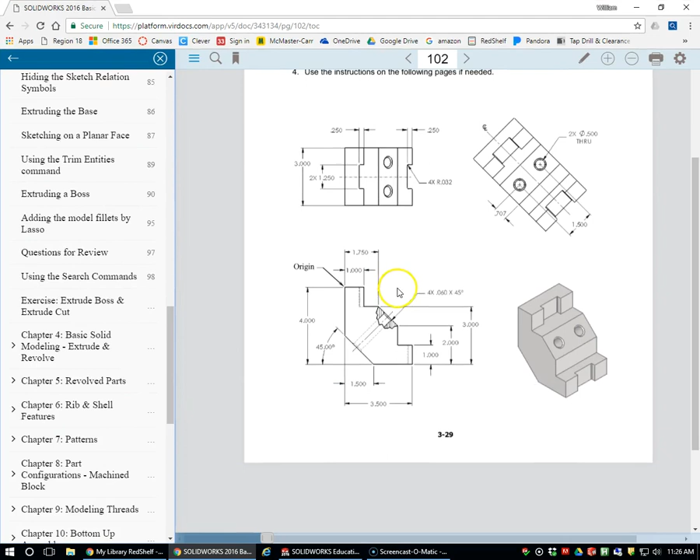If we take a look at this page for a moment, this part is shown in a front view with a broken out section, and a top view. This is referred to as an auxiliary view, projecting this plane up, and we have our isometric view here. All three views are necessary to give us all the details of this particular part.

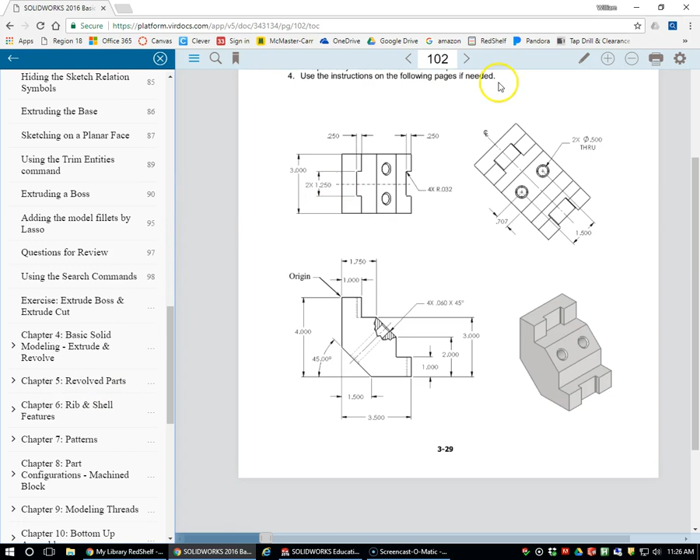We're going to move forward and get started, and most of the drawing is done by creating this sketch. Notice the location of the origin—we'll refer to that once we get started in the drawing. This part is drawn in inches.

I'm going to go ahead and get started by creating a new part within SolidWorks. It's always best to check your units—we're in inches, pounds, and seconds. I'm going to go in one step further and edit the units to make sure we're calling out to 3 decimal places, because some of the dimensions are shown in the book to 3 decimal places.

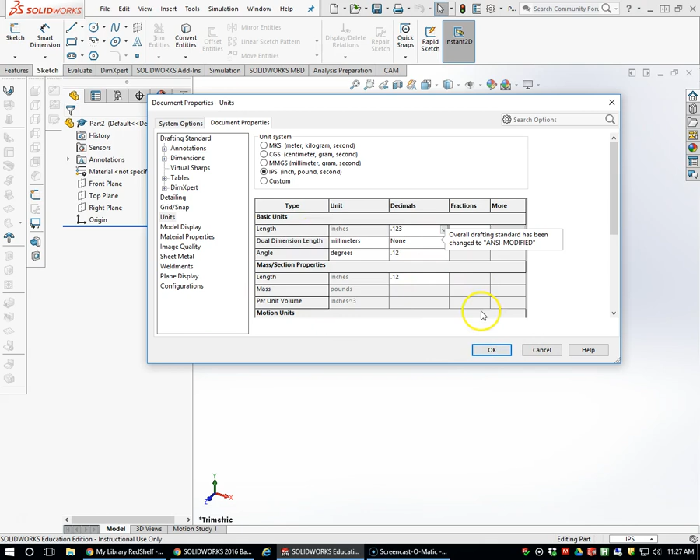We're asked to start by sketching on the front plane. I'm going to turn all 3 planes on for a moment first, just so you can see them. Now you have all 3 planes visible. I'll exit that sketch since I didn't put anything on it, so it's going to go away.

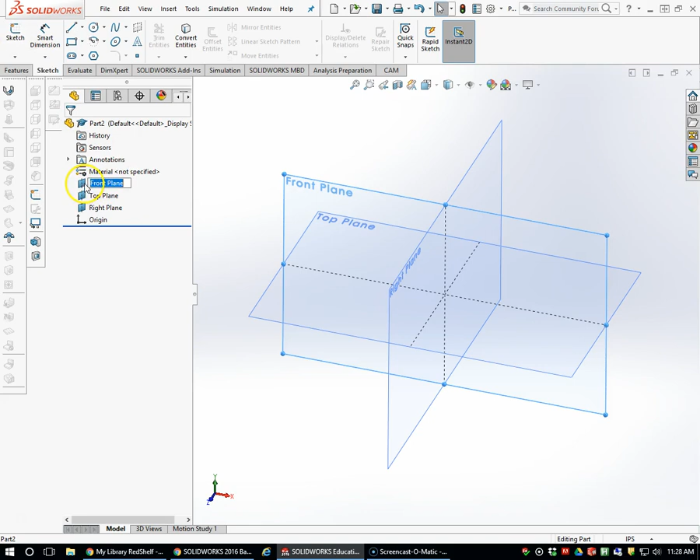There's a number of ways to select the front plane to make a sketch. I can select it first and then go to sketch, or select it here and go to sketch—there's a number of ways to tell SolidWorks that this is the surface we want to draw on. I'll start a sketch, and you'll see that show up right here. Here's my origin. We're going to begin by drawing the feature shown on page 3-30.

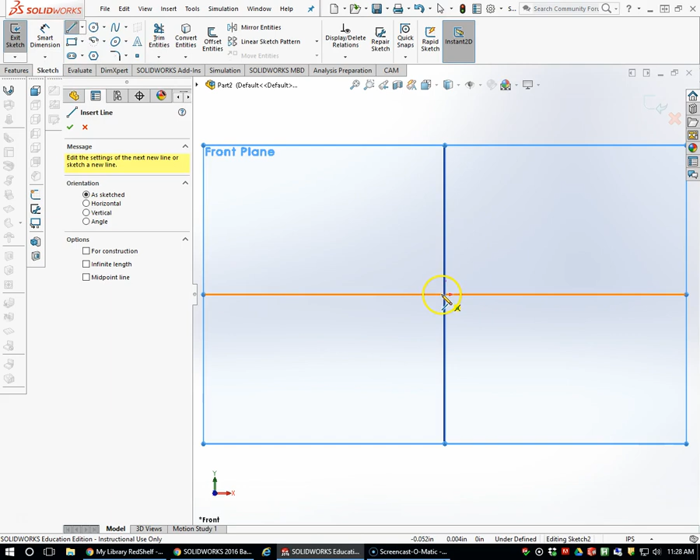I'm going to start with my line tool and just try to recreate this shape as a rough sketch.

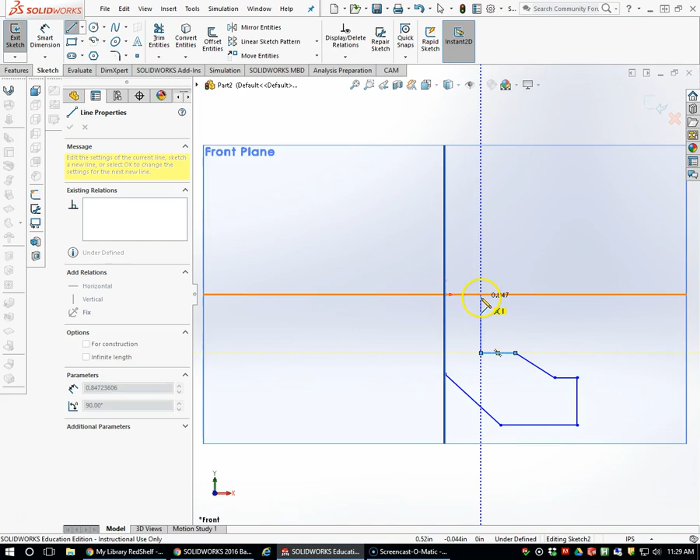The proportions don't need to be perfect yet, because the next step is to go add some geometrical constraints and some dimensional constraints. I purposely drew these not parallel just to make sure the option was available for me to add that geometric constraint.

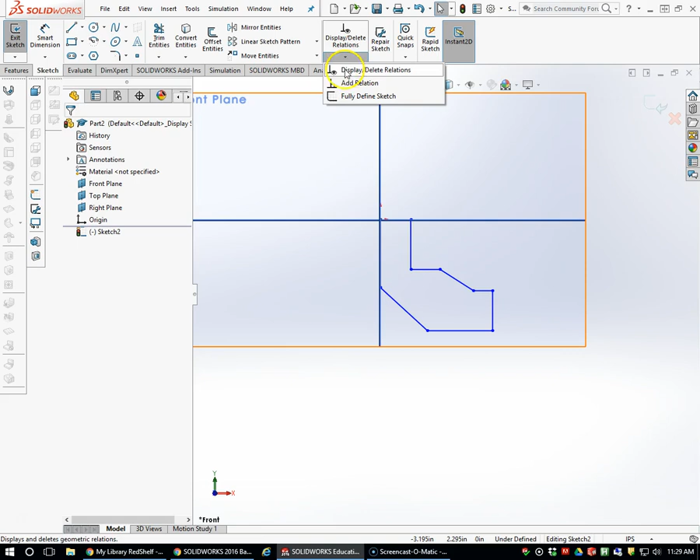So we could go to Add Relation, or if you just hold the control button down and select these 2 lines, make sure they are the only 2 lines highlighted at the moment—they turn light blue. I have the option now, if I click here, to make those lines parallel.

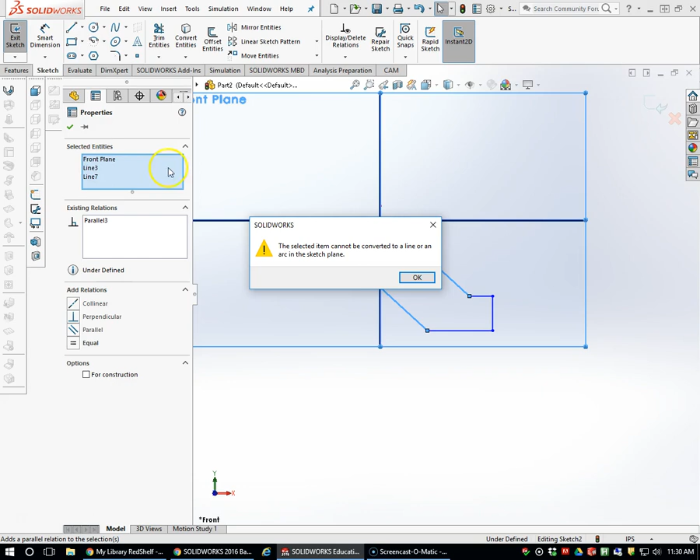I just mentioned to make sure you only have those 2 lines selected, and I didn't notice my front plane was currently light blue also, showing up here, and this is why I got this error message. All I need to do is delete that one option, go back to having just my 2 lines selected, and now I hit parallel and I shouldn't get an ugly message—now that looks good. SolidWorks is happy.

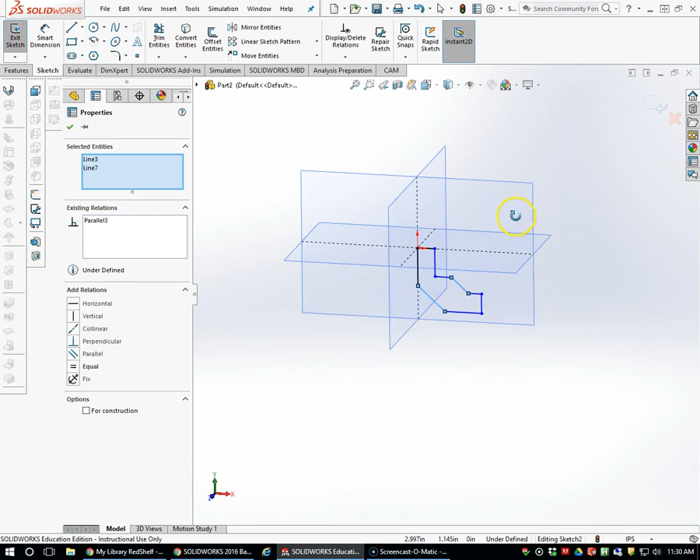Again, just make sure you don't have more items selected—you can check in this little dialog box right here. So we've got those selected. Again, I like to keep my sketch perpendicular when I'm drawing.

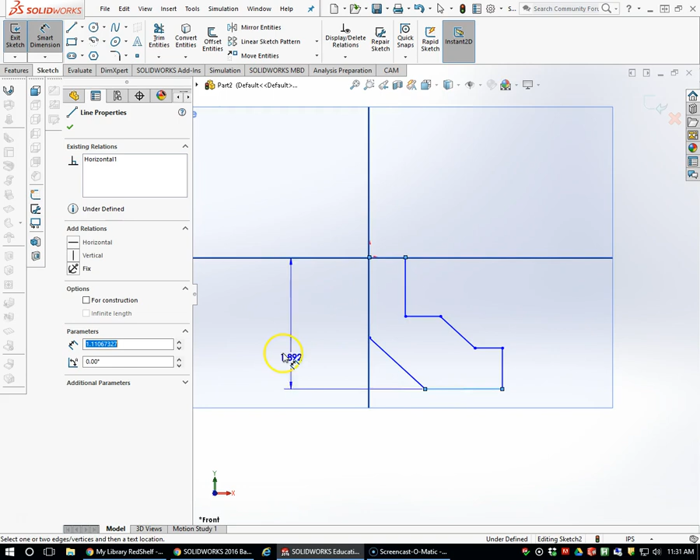I'm now going to go in and add all of these dimensions, so I'll grab my Smart Dimension tool. It's generally a good idea to add the overall dimensions first, the large ones—so I'll add my overall height, then my overall width. Don't panic too much if your part starts to look a little stretched out to start; it'll all add up once we add the final dimensions in.

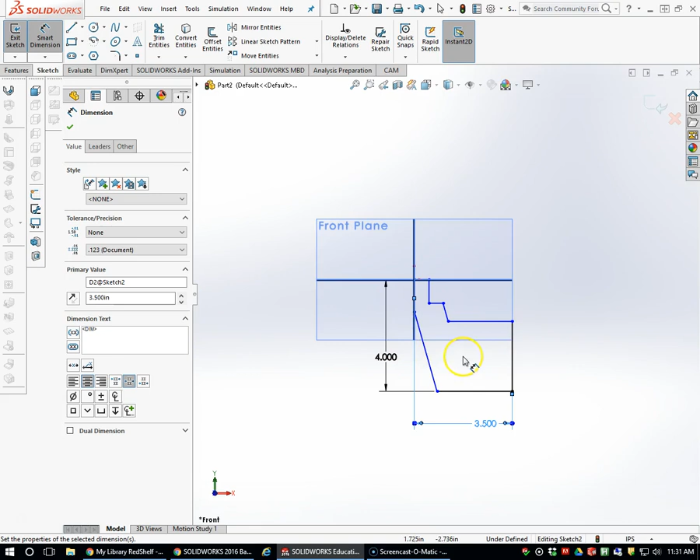Now I can go in and start adding these other dimensions. This one here is 1. There's a couple of ways to add that dimension—I could add it by selecting the single line. Let me go back to my dimension tool. If I select a line, I can add the dimension this way.

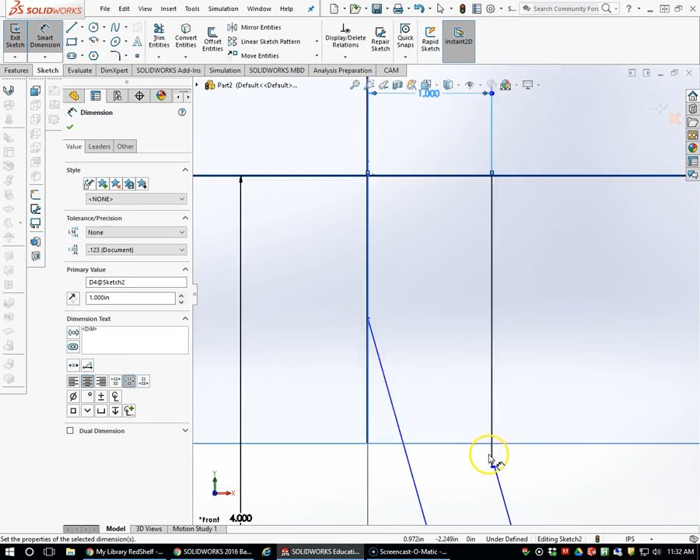Or I can reference the 2 points. Now this got a little confusing—this line got very short, so I'll add a dimension from here to here. It would have been smart of me to add this dimension first, 1.75. Pull that guy out, and we need to add this dimension.

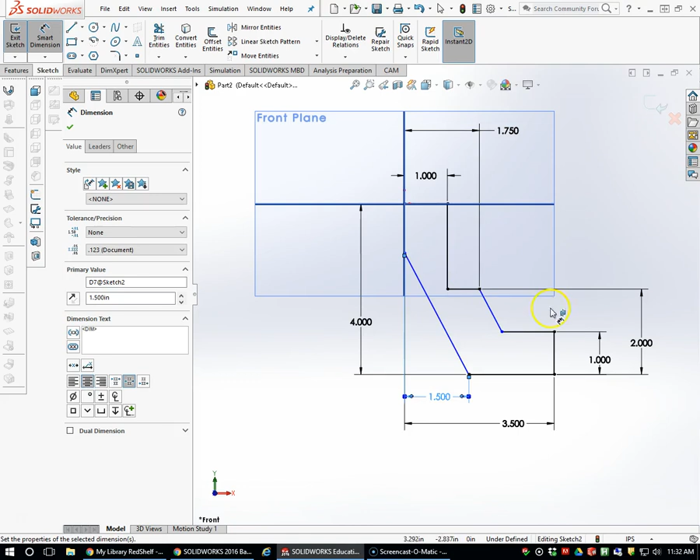Again, I can dimension to a point or to a line—that one's 2, starting to shape up. 1.5 for this guy.

And 3 for—oops, I put that dimension to the wrong location. That one's supposed to be 3. And there's supposed to be another line in here.

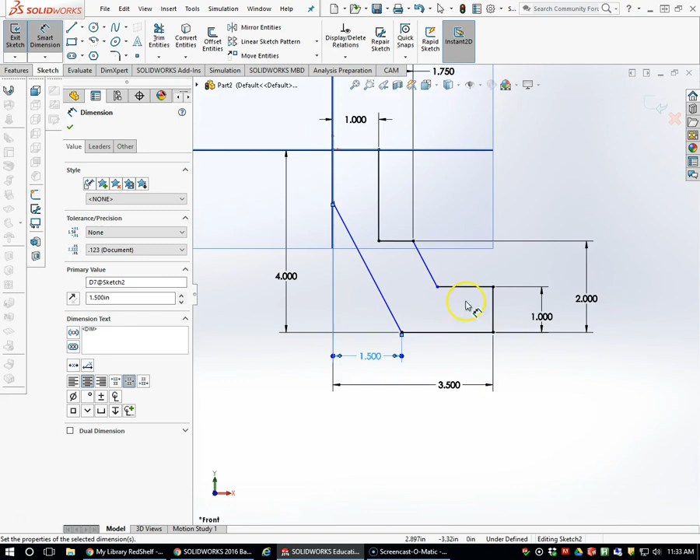I missed a feature, so I need to add a feature to that. Right now those two things are connected—let me see if I can get out of my smart dimension. I'm going to display relations.

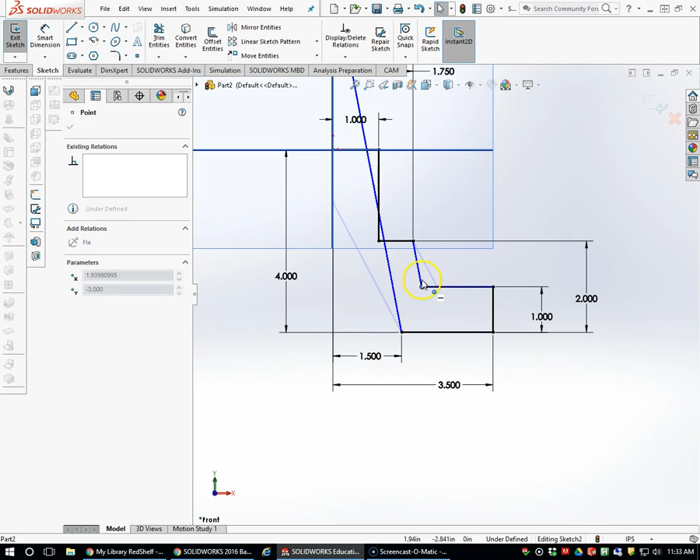Get out of that. All right. So I think the easiest thing to do would be to delete that line and redraw it. So that's what I'm going to do. Come in here, draw a line over, and then draw my line down. Now, of course, I'm going to need to go back and hold the control button

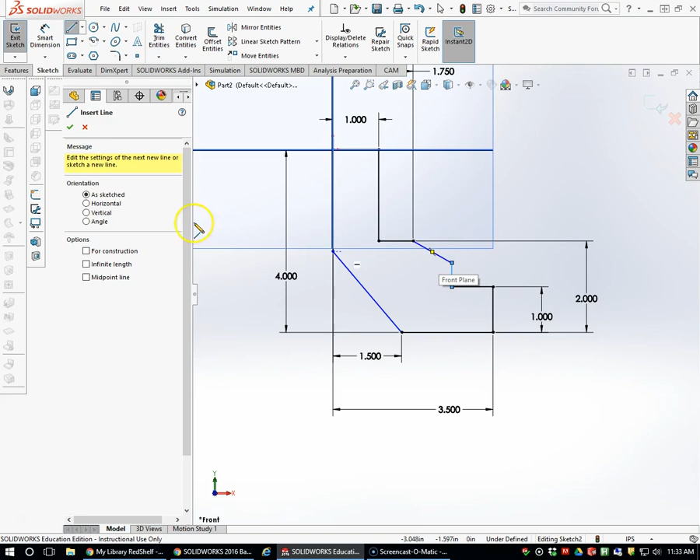and make these two parallel again. Here we go. So this dimension was actually supposed to go to here, and this dimension is supposed to be 3. So let's go ahead and fix that. If I click on this, it'll allow me to change that to 3. And then I can come back in and add a dimension to here.

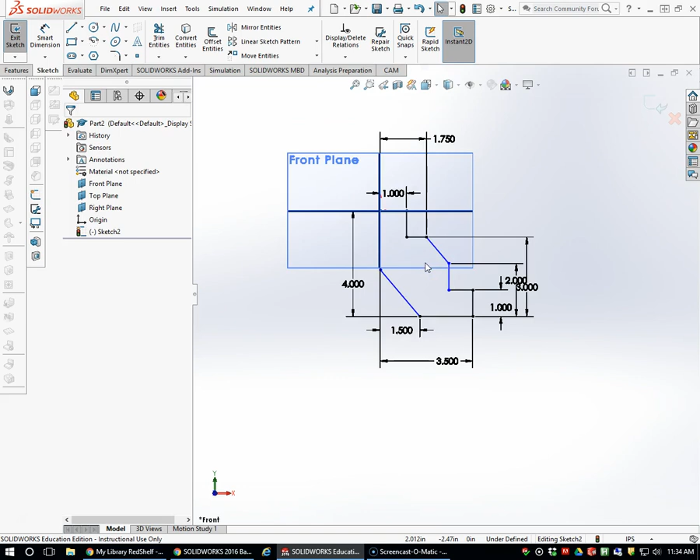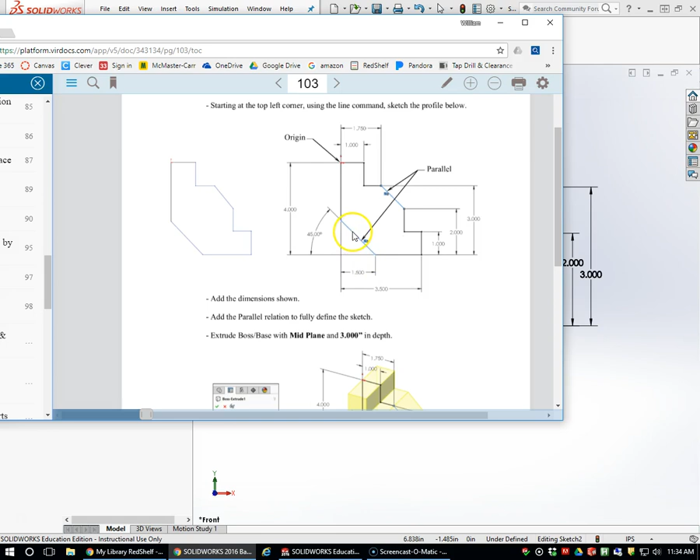Okay, these two are parallel. Now we just need to add, I think, all that's left is our angle dimension, which should finish defining our sketch. When you add an angle dimension, you're going to pick the 2 lines that you're referenced to. If I refer to the book just for a second, notice that this 45, if I carry this extension line down, it's referencing this line, and this extension line is referencing this line. So that tells me that these are the 2 lines that I need to select in order to get the correct dimension.

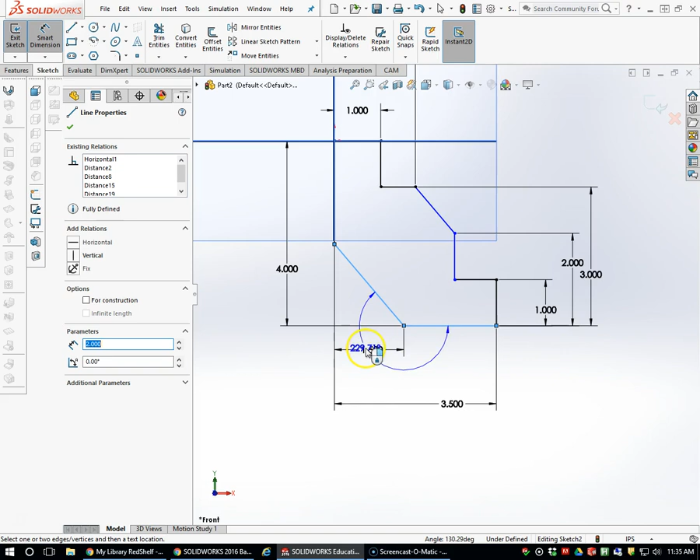So grab the Smart Dimension tool, select this line and this line. Now, as I move my cursor around, it gives me 4 different options of where I want to put this dimension. The one that matches the one in the book is this guy over here, and I'm going to type in 45 degrees. Notice that everything turns black and I get the message at the bottom telling me it's a fully defined sketch, which is good.

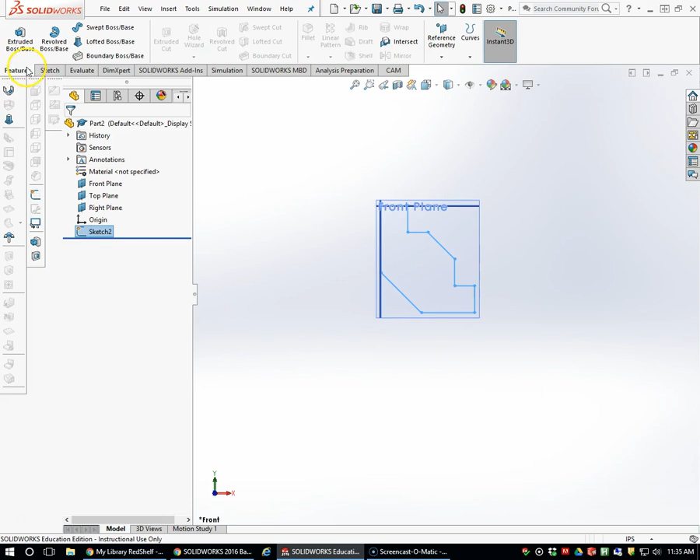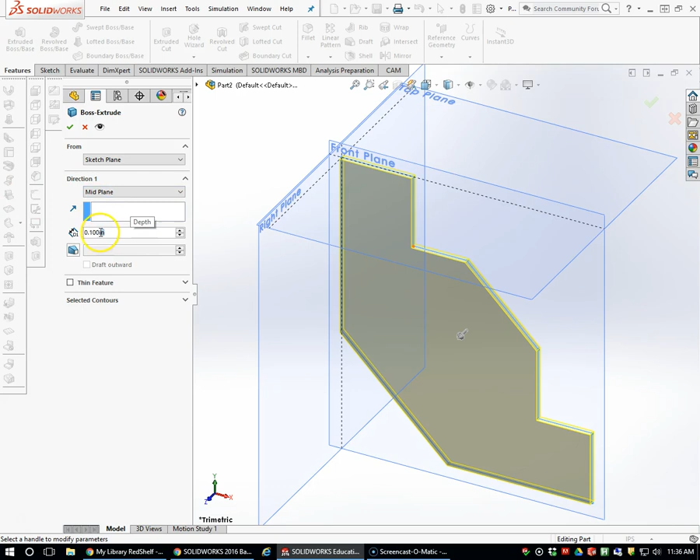So I can now exit the sketch, and referring to the instructions in the book, as we go to extrude this feature, or make a feature by extruding the sketch, we're going to select the mid-plane option. You're going to see what that does is it pushes the part out in both directions from the front plane, which is important when we get to some other features in this part. If you miss selecting the mid-plane, you're not going to be able to use the origin and have everything work the way you want it to. So that's 3 inches we're looking for here.

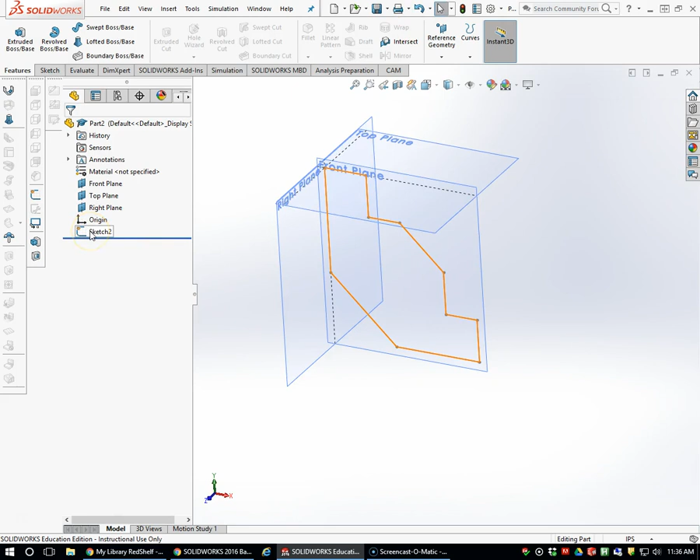And now we've got our extruded part. I'm going to undo that for a second because I did that kind of quickly, and I want you to notice that right now my sketch is not selected. If I try to go to Extruded Boss, SolidWorks doesn't know what I want to extrude. I can select it by going here, or a better way would be to click on this and reference the sketch here. Notice that it's now highlighted light blue, and I can do my extrusion.

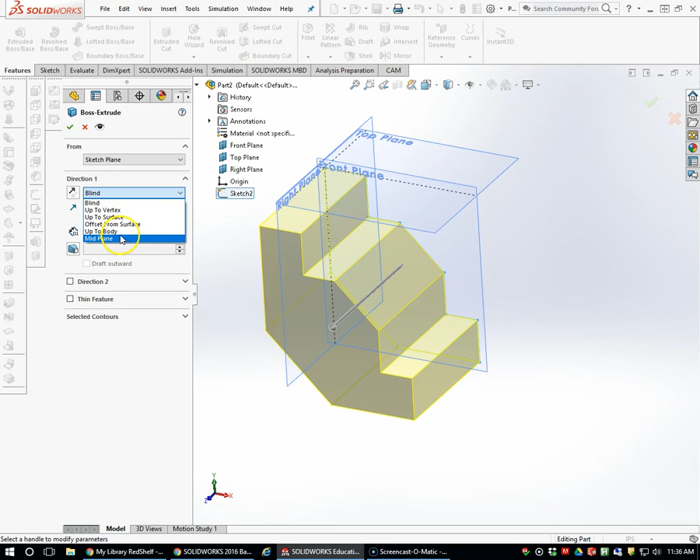The default is blind, so I'm going to switch it back to mid-plane, and I've got my part.

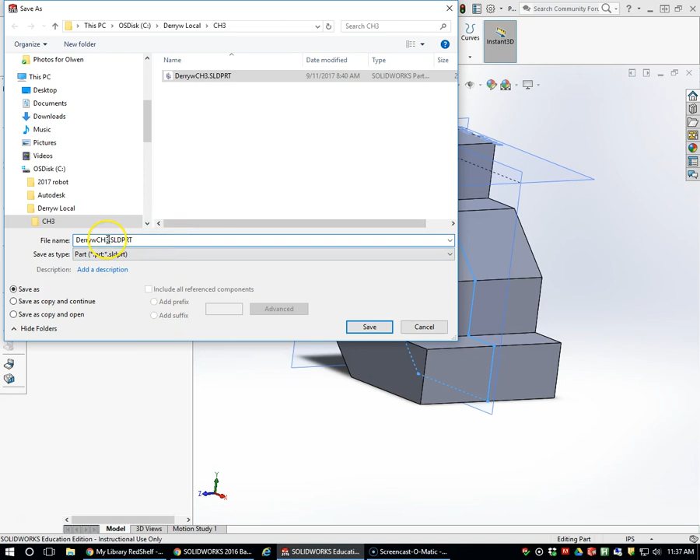All right, I'm happy with what I've done so far, so this is a good time to hit save. I'm going to go to save. Like all the other exercises, I'm going to save it as last name, first initial, and what chapter it is, and this happens to be exercise 1. I don't want to hit save right now because I'm going to save over that previous part that I drew, so I need to add a little more to this. I'm just going to put EX1 for exercise 1. And I have my name, what chapter it is. I'm good to go.

Alright, now we can add the next feature, so I'm going to move forward in the book to the next page, and the next feature we're going to add is a cut feature. We're going to do that by adding a couple of holes, and we're going to add some geometric constraints that make those holes symmetric. Alright, so I'll show you how to follow along with those steps.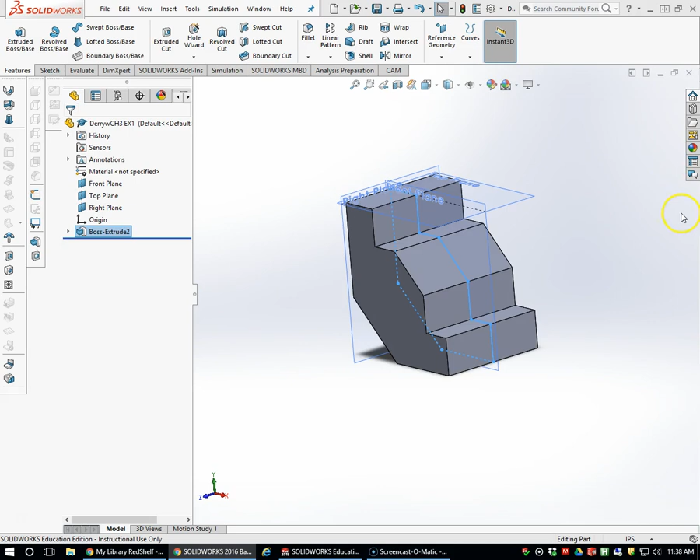Okay, so the book is referring to Control 8 to make yourself look normal to a plane. I can select the plane, go to normal to, or hit Control 8, and it's the same thing. It's going to bring me normal to that plane. While I have that plane selected, it says open a new sketch and draw a center line. I could say go to new sketch.

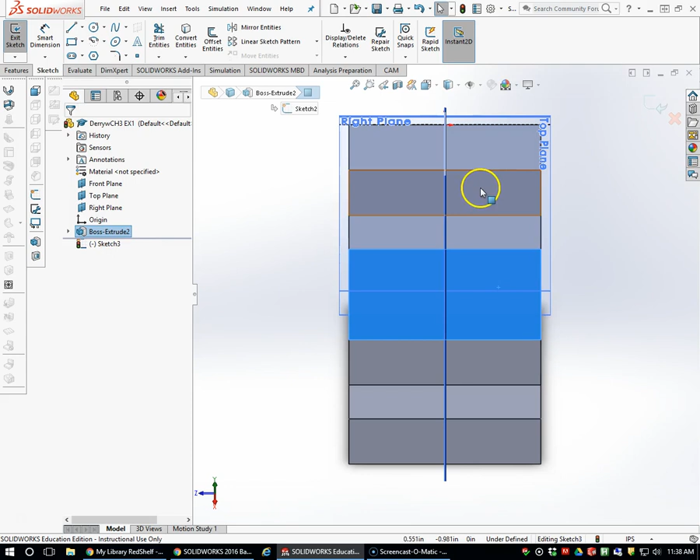Actually, I will do that because that's what the book is calling for. So because that's selected, SOLIDWORKS knows that that's the flat surface that I want to put my sketch on. So it's now associated with that plane. It says to sketch a center line from the origin. Well, in order to make a center line, we need to pull down from our line tool and select the center line option.

When we click on the origin, we get the coincident symbol, telling us it's snapping to the origin. I'm going to click and draw a center line all the way down. I pulled it a little longer than necessary, but that's okay so I can see it. It's just a construction line.

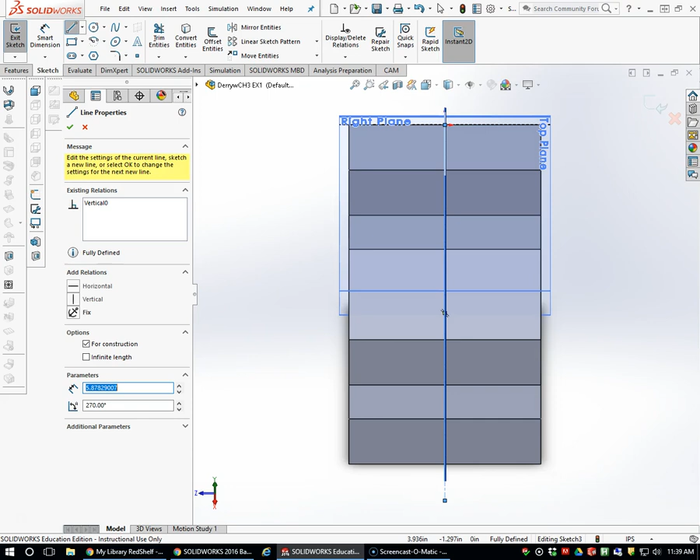We're going to add two circles, one on either side of the center line, then create some relationships and add dimensions. I'll grab my circle tool and roughly click over here and over here. I'll hold control down and select, let me get out of the circle command first. Now holding control, I'll select the other circle, and I want them to be equal, so I only have to dimension one of them.

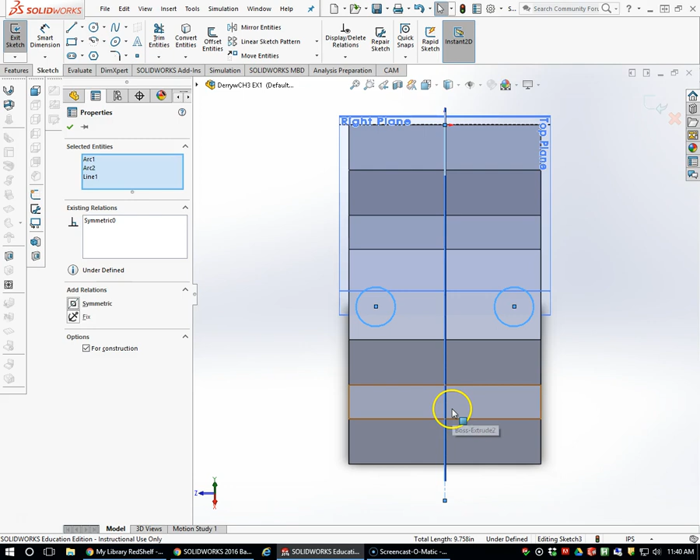I'm going to select the center line. These are already selected, they're still blue. If I hold control down and select the center line, notice I have the line and both circles selected. I can hit symmetric and it's going to put them opposite each other around the line.

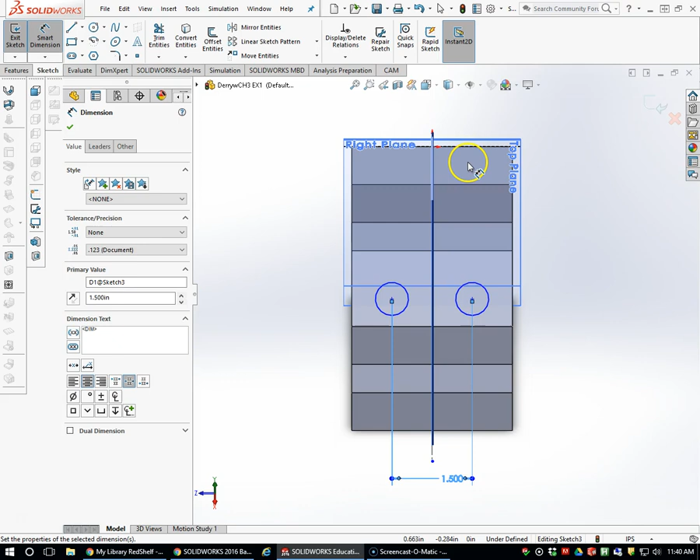What that does is allow me to set dimensions in a way that makes sense for this particular part. What's important is the distance between these two holes. So I've grabbed my smart dimension, set the distance between them at 1.5 inches, and made them centered about the part. I could do the math to figure out the distance, but this forces them to be centered, so if I change my extrusion, they remain centered.

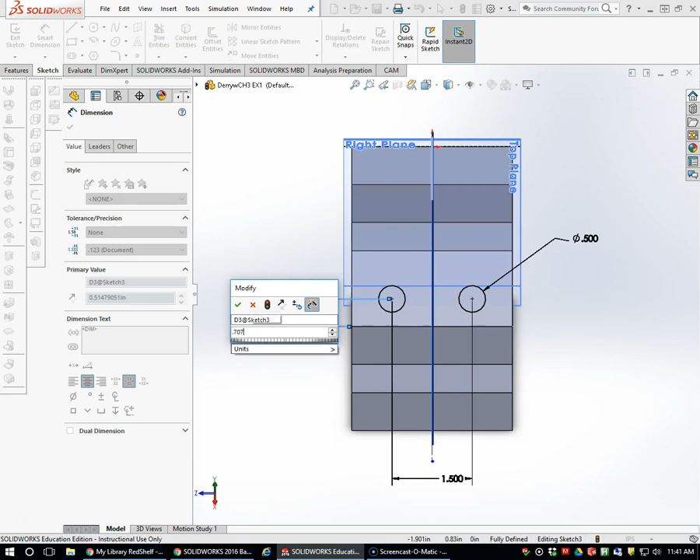I need to add the size dimension, which is half inch, 0.5, and then I need to tell it how far up off of an edge here, and that dimension is, let me put my glasses on, 0.707. Alright, I get my black lines and text telling me this sketch is fully defined.

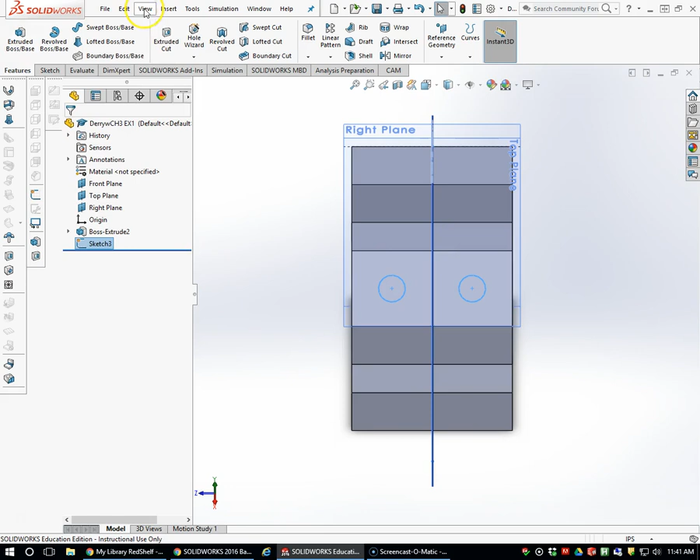I can exit the sketch. It is highlighted. I'm going to go to features. We're not going to use extruded boss because we want to put holes in this. Instead, we're going to use extruded cut. I'm going to rotate it so you can see what's going on, and I'm just going to say go through all and hit OK, and we should end up with a couple of holes in here.

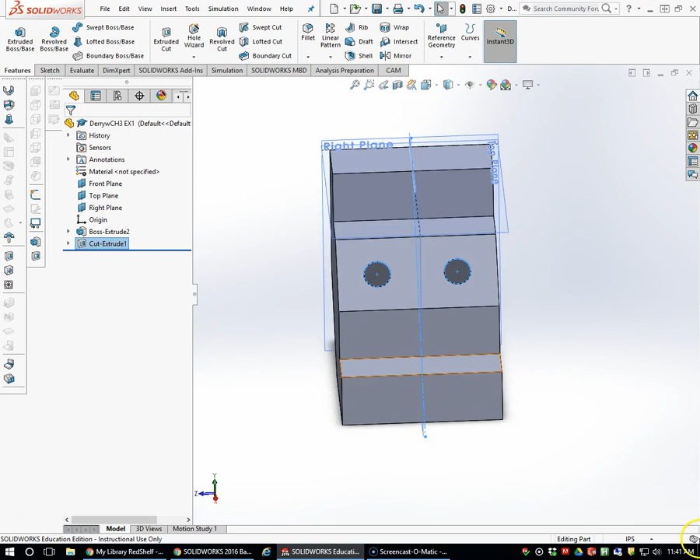Alright, looking good so far. So next we need to add the additional cut features. We cut the holes out, but now we're going to add these. What I like about this author is he's going to teach you some neat tricks, remind you about making things symmetric, and we're going to use those geometric constraints.

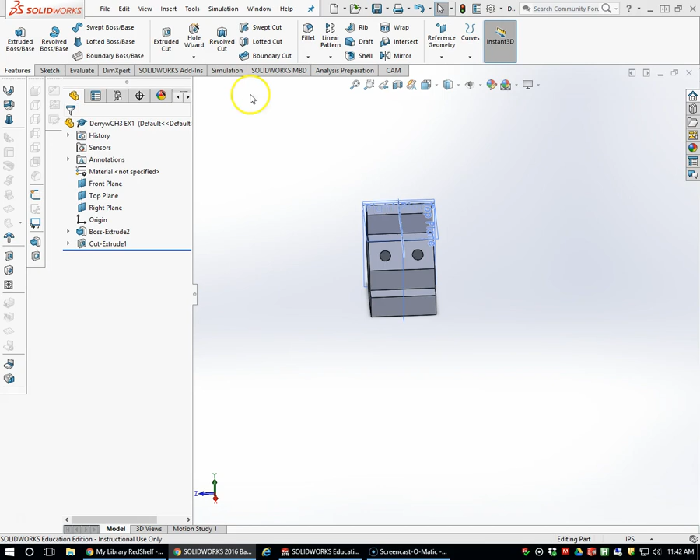So in this case, instead of telling you to select the sketch command, he says create an extruded cut using through all, and I don't believe in the previous page he tells you to make a sketch first, let me double check. Yeah, he doesn't tell you to make a sketch on there to begin with. So we can go straight to extruded cut and select this surface, and SolidWorks will automatically throw a sketch on there.

Now I'm going to look normal to that because I want to view it this way, and I'm going to begin making that rectangle. Actually, I'm going to make my center line first. Again, I can use the origin to snap to and make my center line.

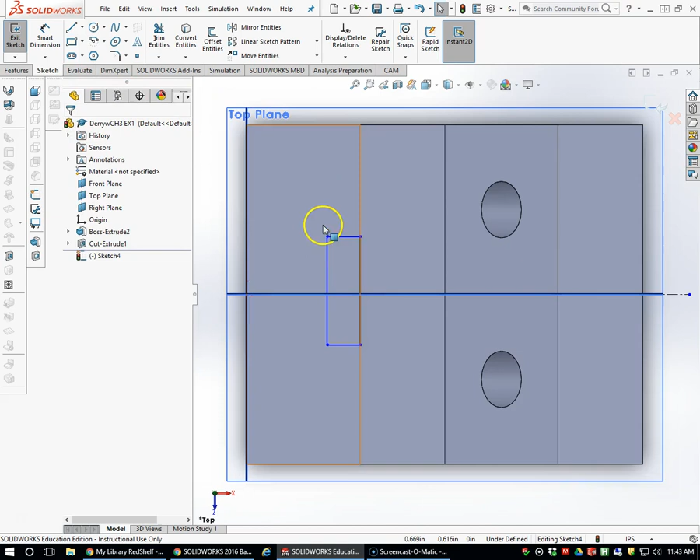Come back up and grab my rectangle tool. I want it to be coincident with this edge, so I'll highlight that edge and drag my rectangle down and hit OK. Now if I hit escape, my rectangle turns dark blue. I hold the control button again. This is just like we did with the circles.

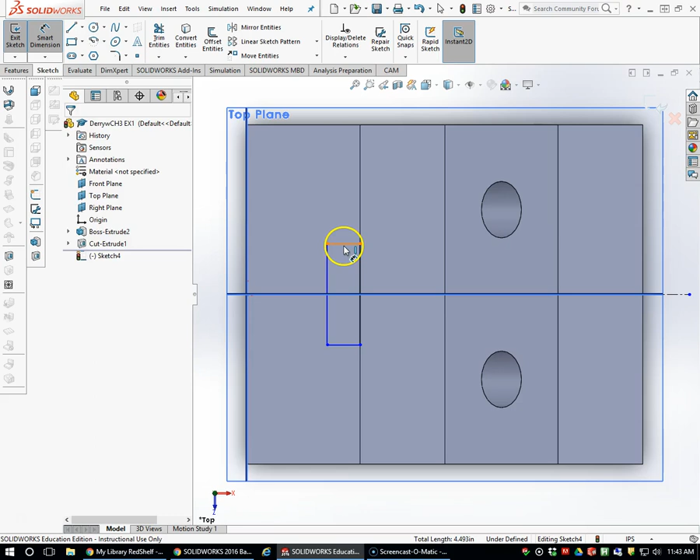Select this line and then select my center line and again make it symmetric. Whatever dimension I now add in here, it's going to stay centered about the part. So let's go ahead and add those two dimensions in. We want a dimension here of 0.25, and we want a dimension here of 1.25.

And again we get the fully defined sketch, it's all black. What's neat now is when we exit the sketch, because we selected the cut extrude option to begin with, as soon as I hit exit sketch, it knows that I want to cut this. So we kind of saved a step by doing that. It automatically launches us into this.

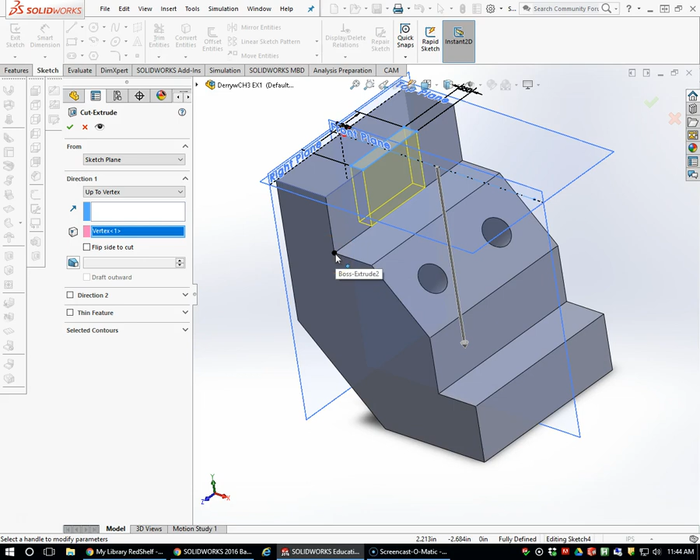Now we want to cut up to a particular face. So we're going to select this face, or we could select cut to a vertex as an option. Let's see, if we pick this option and hit this point, notice it only cuts that deep. So I select my vertex for my extrude, and bingo, I've got my extruded cut.